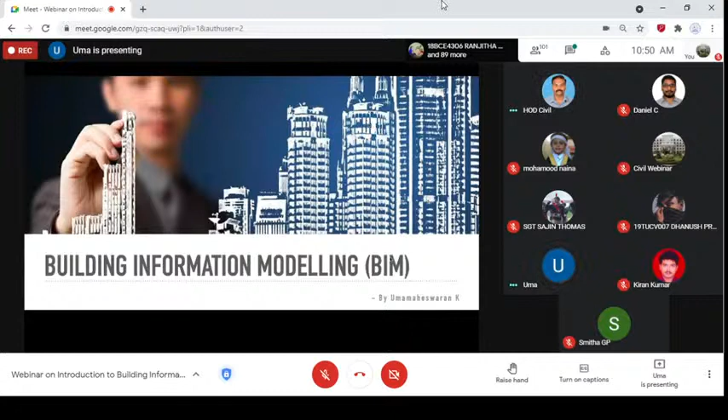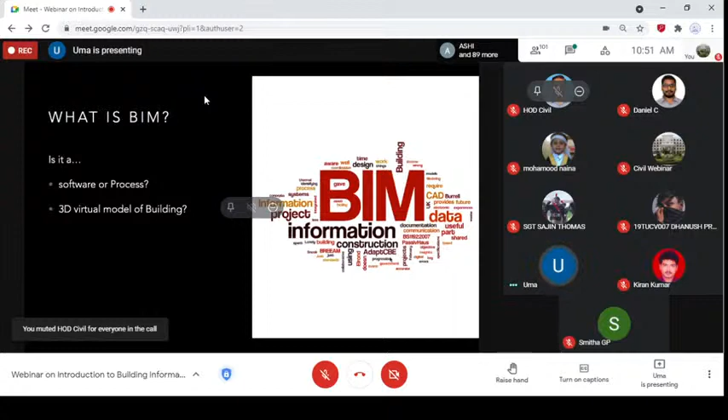So what is BIM actually? Is it a software or a process? Is it a 3D virtual model of a building? Or is it a collection of all building data to help query it in a visual way? These are the things people assume when they hear the word BIM, right? It is actually everything and much more.

One of the main misconceptions is that people think BIM is a software, which it is not. BIM is not a software, it is a process, it is a concept. To put it simply, in very layman's terms, it is like having a single file for the whole construction project. All the work, all the data, everything is collectively put together and shared as a single file — that is the concept of BIM.

We'll go deep into that. Before continuing, I want to remind you that right now you're seeing the screen share of my laptop, but I have also shared an iCloud link with Sarangan, which I think he posted in the chat. You can also click that link to view the presentation in the browser while still hearing my voice through Google Meet. If you view it in the browser with that link, it will be of higher quality — it's just an option for you, you can check it out.

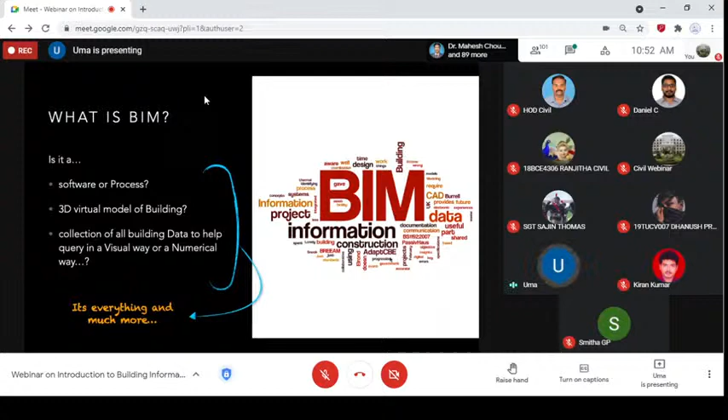Moving forward, so what is a BIM? It is actually a BIM model — nothing but a virtual equivalent of the actual building parts and pieces used in building. So when you model a building, you are completely constructing the actual construction in the virtual world, and that kind of detailing should be there in this virtual equivalent. That is the actual BIM model.

And when we say, many 3D models are just about length and breadth, right? But a BIM model should also have the characteristics.

So what do you mean by the physical-logical equivalent of the counterparts? It means that when I say this part is concrete and this part is steel, and when we stress or compress it, that actual property should be available even in the virtual model. So that kind of physical property should be implemented in the virtual model.

And the intelligent elements such as walls, columns, doors, stairs, all should be there, which will help us simulate the building even before construction starts. So that is the actual purpose of BIM, right?

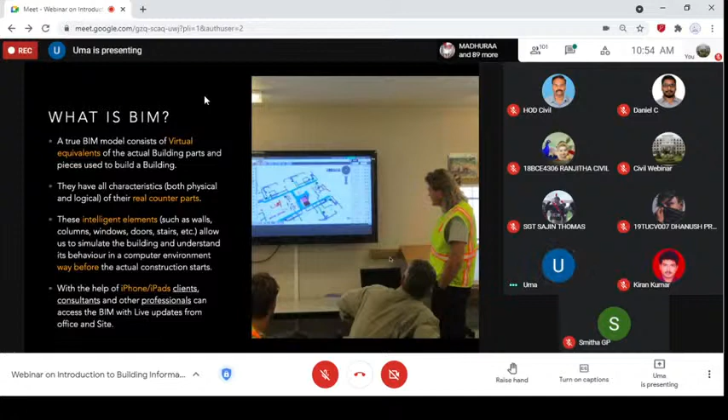And the last thing, an additional outcome, is that it helps collaboration. With the help of our iPhones and iPads, clients, consultants, professionals, all stakeholders involved in a project can collaborate on a single platform. Not like what we are doing right now, handling separate files — everyone handles that single file.

So what is our industry doing so far? Before the introduction of BIM, we had our computers, our models, and software. Everything seemed good and well, right? But what is actually happening, I'll tell you.

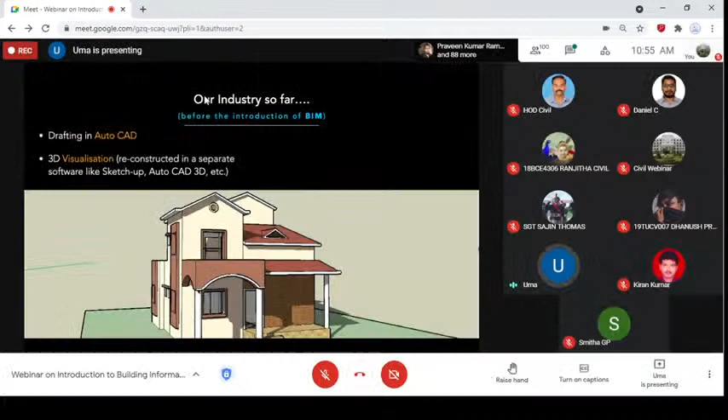So we do our drafting in AutoCAD — that's a separate thing. And if we want to visualize in 3D, we use software like SketchUp, AutoCAD 3D. But the important thing is they are reconstructing the same thing separately from scratch in that new software. That's something funny happening. They have the drawing in AutoCAD as a separate file, then reconstruct the same thing in SketchUp from scratch just to show it in 3D. That's what's happening right now.

And the same goes for analysis software — there are so many, like Staad Pro, ANSYS, and others. But again, the same thing applies: if you want to create and analyze that model in Staad Pro, you have to construct that model inside that software from scratch.

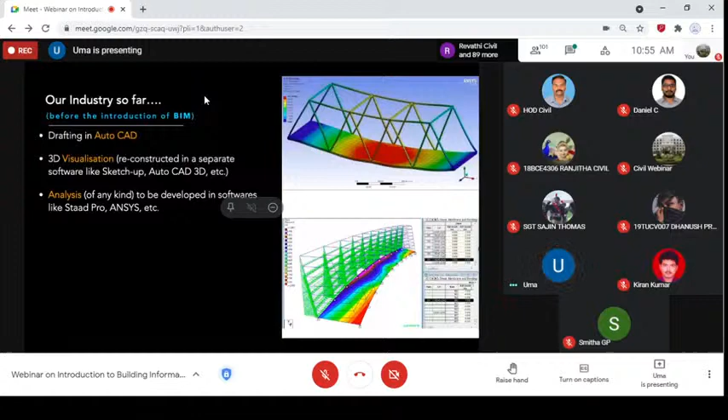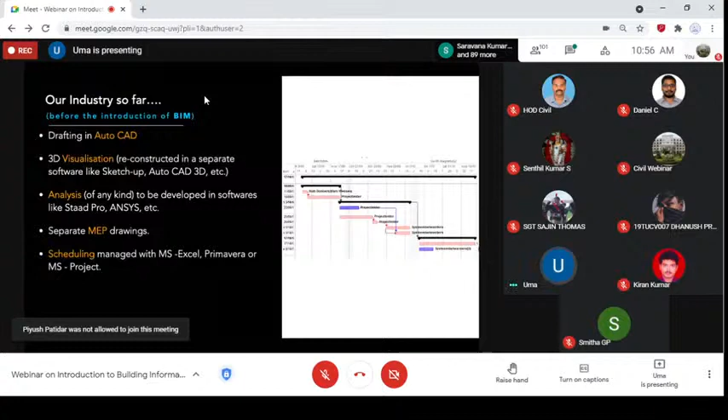And finally, everything has a separate documentation process — manual paperwork still happening. Because of this, the outcome is poor collaboration between all departments and stakeholders. This is what's happening in our industry so far, and we can confidently say this has been the case for almost 10 to 20 years — it's still happening in most projects today.

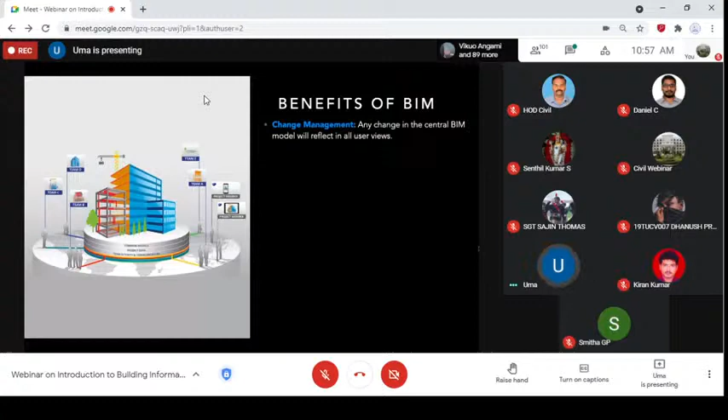So what we are trying to do with BIM is essentially the opposite of the previous slide. If I change anything in the center, whatever you change in that single BIM model will reflect in all views, for all stakeholders. I'll just let you read these benefits since they're self-explanatory — it's just the opposite of the previous slide. I'll give you a few seconds to go through them.

Hello sir, excuse me sir. Sir, can you please make it full screen so we can see it clearly? Yeah, it is in full screen mode. Sir, again, my laptop is in full screen only. This is the maximum — I don't know, maybe something with Google Meet. Are you seeing any of my laptop elements other than the slide? No, sir, no. Then that means it is in full screen. Okay sir.

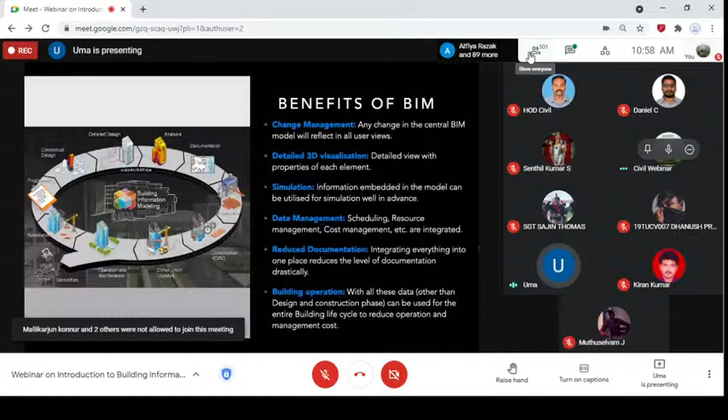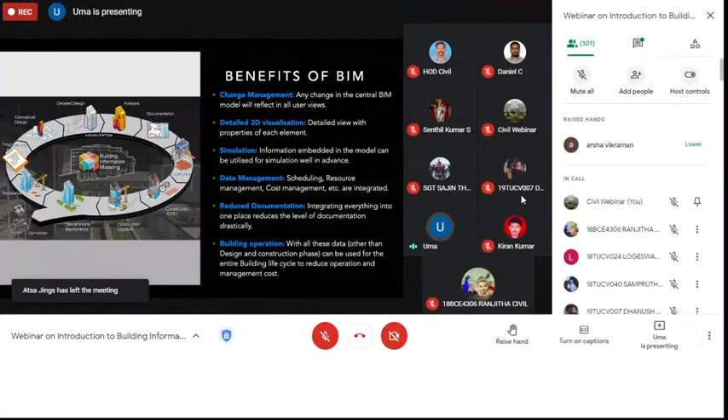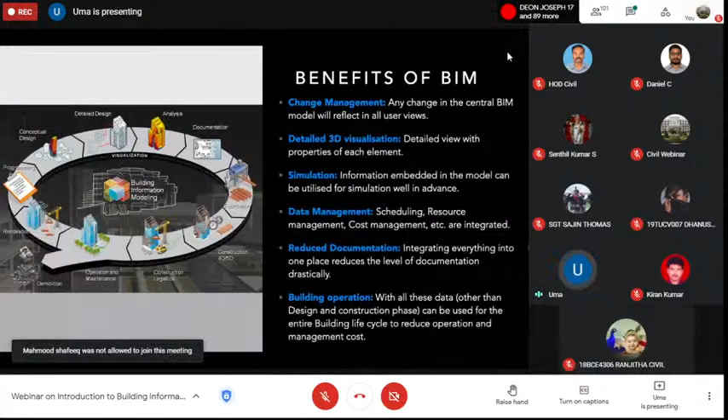So essentially, we are trying to collect the data right from the starting planning and designing stage — all the data, resources, and calculations put into a single file, and have it for the whole building cycle. When I say whole building cycle, it's not just the start and end of construction — it's the life cycle of the whole building: working, operation, maintenance, till the destruction. As you can see, the whole cycle goes till demolition. All that data, from start till demolition, is present in a single file, which we call the BIM model of that specific structure. That is the whole idea.

Okay, shall we move to the next one? Okay, I am going.

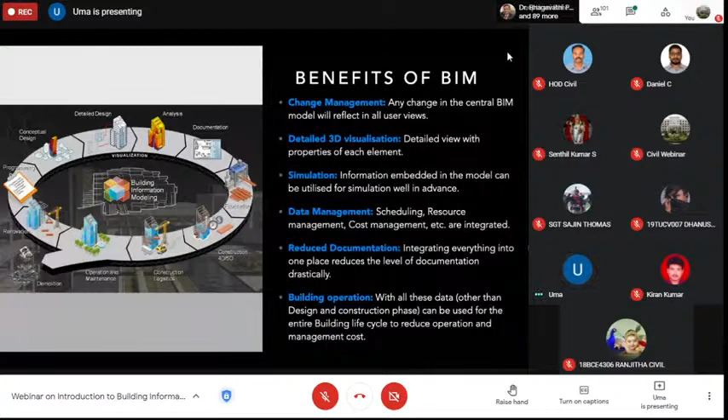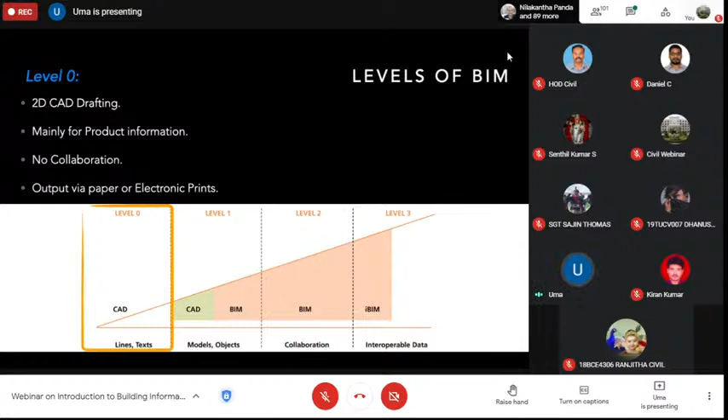So I have essentially told you everything about that - you will just quickly give it a read. This is level 0. The last point is the worst part: whatever they do in the computer, they take it out as a print. So it is in paper and electronic prints, and everything was manual. That is level 0.

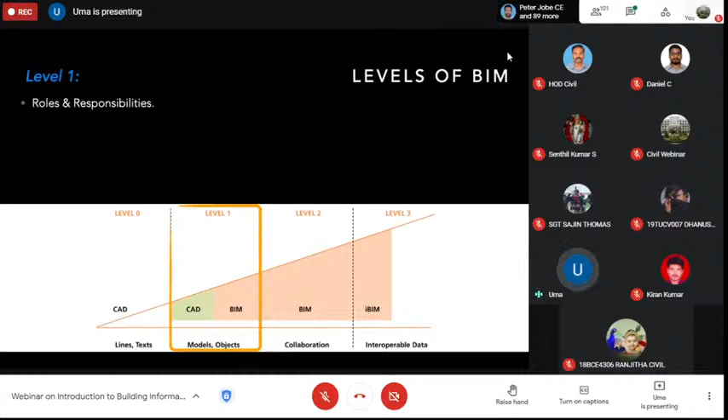Now comes level 1. We can for sure say that even the low level or basic construction sites are following level 1 up to some level - I can say they are starting. Everyone is having mobile phones and computers, so that is how it is happening, they are using systems. Because of that there are some roles and responsibilities.

When I say roles and responsibilities in the digital world, I mean in the digital part of construction, people are having roles and responsibilities. And naming convention is nothing but how to name a file. So architect people will have naming conventions, and designer people, scheduling people - all the departments will have a naming convention for the revisions and everything. That is called naming convention.

Common data environment means nothing but having all the files in a common area where all other members can access it. Put it simply, it is nothing but Google Drive - like Google Drive or Dropbox. But generally people won't use that because of security reasons, so they have their own servers where they put all the files into that common data environment, so that it is accessible by all the other members.

Most important thing is the file is up to date even for the other member. For example, if I have a file in my local system and I do an update, I have to send that file as an email - even we are doing that even now. But if it is in a common data environment, if I make a change to that file, when the other person opens it, it is immediately visible to him. So that is the great advantage of common data environment.

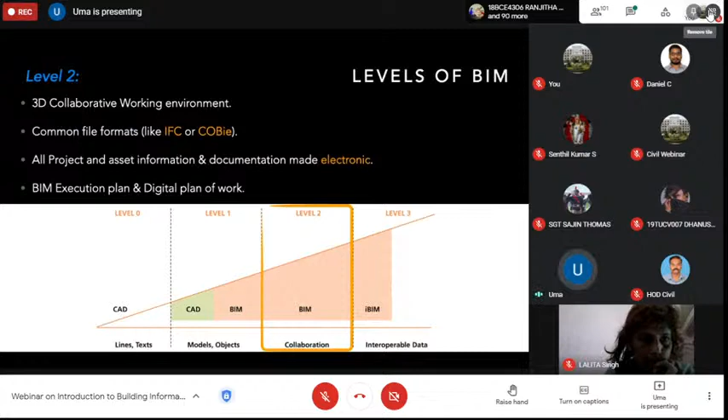Another thing, the second point, is common file formats. Even before the project starts, the stakeholders, most importantly the clients, should have guidelines saying this kind of file should be followed with this format. Let me give you an example.

There are many drafting softwares, one of the most famous is AutoCAD. For 3D modeling, if we go to one person, he might use any software of his wish, like SketchUp or AutoCAD 3D. That should not be the case. The client or stakeholders, when signing the project itself, should predefine that if you're going to give this kind of file, it should be under this format, meaning the person creating that 3D model should follow only that file format or software.

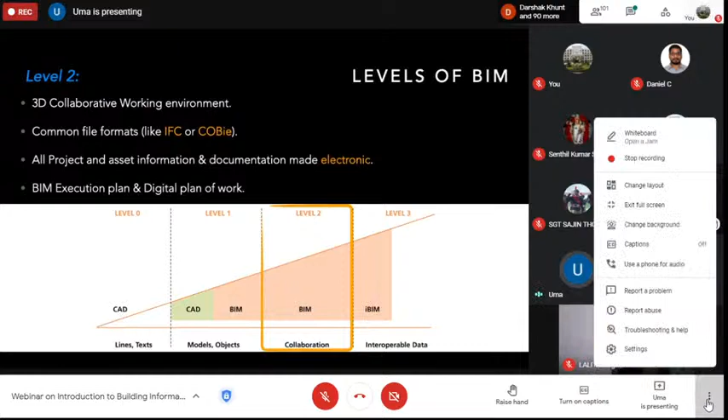Why is that important? Because there are so many stakeholders, hundreds and thousands of people sitting in different areas and departments, with separate systems. When this is defined in the starting stage itself, sharing of files means when the other person gives you his file, you'll know it will open in your system. That's the advantage of having a common file predefined at the start. That should happen, which is not happening currently.

You might not see this as a big point today because we ourselves are using common files - we assume the other person will have AutoCAD, we assume they'll have SketchUp, we assume they'll have MS Project. But we shouldn't assume, we should have a defined format. So that's the second one.

All project and asset information and documents are made electronic - in other words, no paperwork. And there's a BIM execution plan and digital plan of work, meaning there should be a separate BIM department in the company to take care of all this work. There should be a BIM strategy head who defines the steps we're going to take. There should be a separate department predefined in the company itself, not just for that special project, but a department in the company itself.

This level 2 is something people are struggling to achieve worldwide, not just in India. I'm not saying it's not happening in India - it is happening, but only in a few companies like L&T, which we can count on one hand. It's happening in India on a very small scale, but it is happening. We're equal to the whole world.

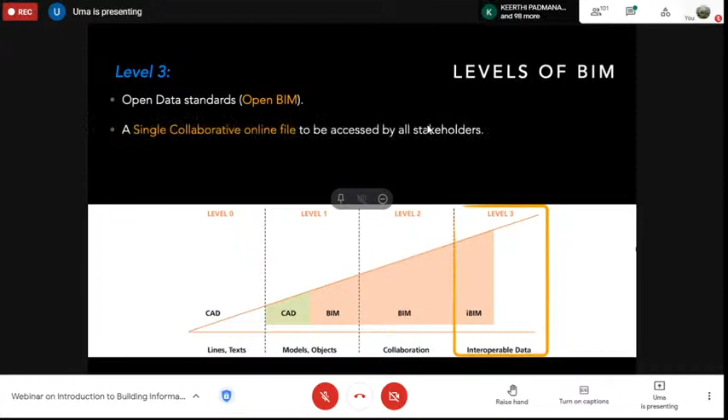Now comes our future, or our vision - level 3, which is nothing but open data standards. All file formats shouldn't be restricted to access only through specific software. A file shouldn't say it can be opened only through this software. It should be open source.

What can I tell for an open source file? Yeah, we can say PDF. So PDF is an open source file. You can open that PDF in any reader or document reader, because it's an open source file format. But that's not the case with our Revit files or other BIM 360 or mostly other AutoCAD files. If you want to open a Revit file, that can be opened only using Revit software.

That shouldn't be the case in the future. That is what we meant by saying open standards.

Second point, which I have repeated many times, is to have a single collaborative file online, which can be accessed by all the stakeholders. Third point is nothing but the first point, resolve and eliminate issues such as copyright and liability. Hope this makes sense, from level 0 to level 3.

So in short, whatever we discussed, it is here. I'll give you a few seconds to go through it.

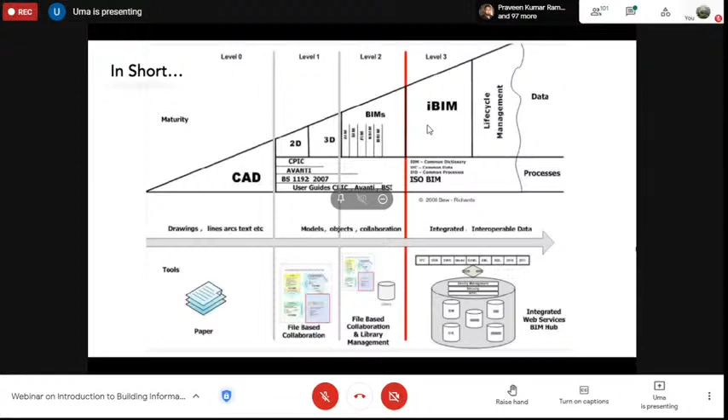Now we look at the different stages of it. Few people might be familiar about this, but still, it's good to see it in a different angle.

First thing is a 3D thing. Obviously, if you are a civil engineer, you will know what a 3D drawing is. It is the typical 3D visualization of the structure. It contains the properties, information and elements with its properties. That is most important, so it is not just the length and breadth, as I told you. It contains the property of that material that you are defining inside that model, from glass or concrete, steel, whatever.

What is the importance of having that property? It helps to simulate. There are many wind testings, right? Wind testings or what to say...

Just a minute, guys.

Okay, yeah, sorry, coming back. So it helps for simulation, that is the importance of having properties. Like as I told you, the ANSYS software or the STAAD.Pro software uses these properties.

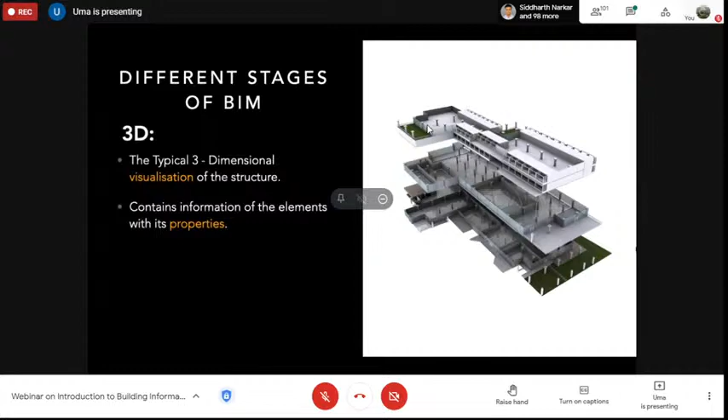Only a few people are following it, but I'm happy that few are following - they are directly starting their projects in Revit itself. When I say Revit, it is nothing but a 3D model with properties. So in Revit with properties, they are modeling it out, and from that, if the site people are asking for drawings, you have to extract the drawing from that Revit model. So that is what I mean by 2D should be extracted from the 3D model. It should not be the other way around - you should not start designing in the 2D thing.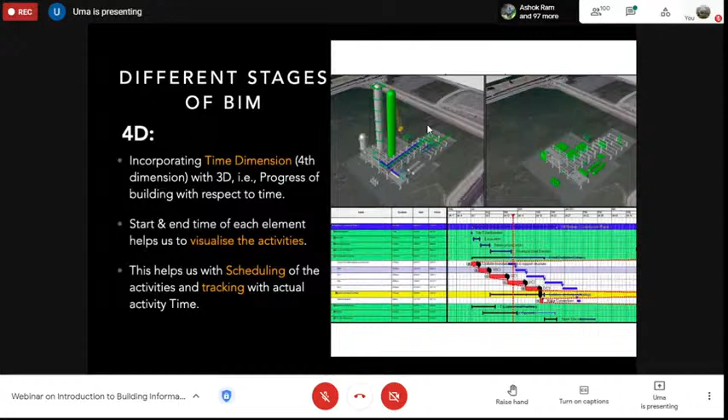Okay, going to the next one. So what is 5D? We already have 4D, and if we include the cost element to that 4D, it becomes 5D.

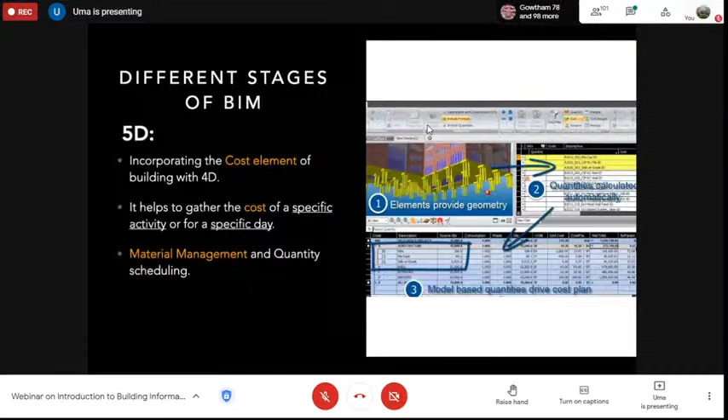And with this, we can have material management and quantity scheduling, bill of quantities. If you work in a site, you know how big a deal bill of quantities is, because it's a tedious process to calculate each and every quantity with its cost accurately. So if you are integrating all the elements correctly inside this BIM model, and if it becomes 5D, this bill of quantity will be retrieved automatically with just a single click of a button, which is huge.

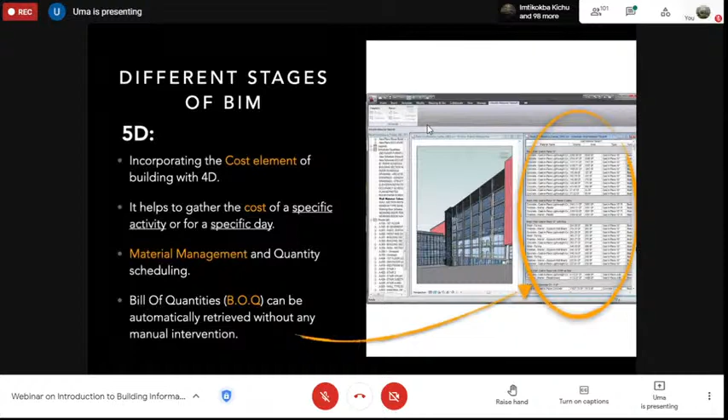Okay, going to the next one. Level of detail. A few people might be confused, previously we saw levels of BIM, but that is different, and level of detail is different. The level of BIM is nothing but how much we have started using, or what is the implementation of BIM in the world. So that is the level of BIM.

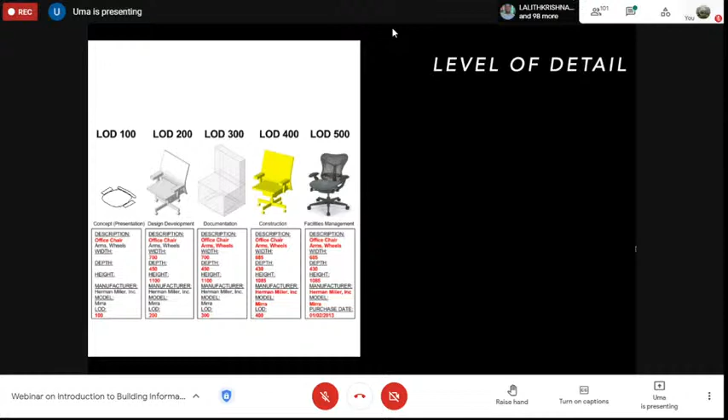Level of detail is nothing but the BIM model that you are creating - what is the level of incorporation of the detailings inside the BIM model. So that is the level of detail. I've shown an example using a chair, but the main idea is you are going to model a structure, a very big building. Keep that analogy in mind.

So yeah, this is actually self-explanatory, so I'll just allow you to go through it. It's much better if you read it out rather than me explaining. So LOD - one thing will be very clear, as the number increases, the detailing increases. So yeah, this is LOD 100.

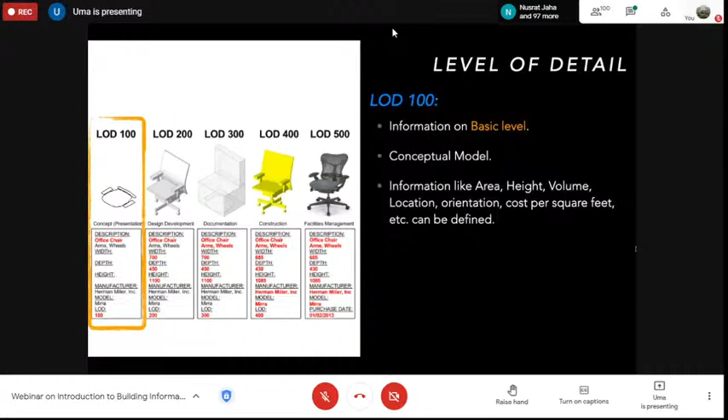Go into the next one. This is level 200.

So this is what I say - why do we have so much levels? Why can't the whole world follow one level of detail? It is similar to having our reconnaissance survey or preliminary survey, and then later on having a detailed survey. So to start the work, people will have at least a level 100 or level 200 and give that file to the next department, so it gives a brief idea about the structure and the project, so that the next person can start his work. So that is the use of having LOD, and also it's much faster.

At that stage, it is enough, so it is faster. A few sites are following level 300, and when I say following, it means it's the final level itself. A few sites are following this level 300, they don't model more than this level 300. By the way, it's the basic thing for a finished model - at least it should be level 300 to say that it's a good BIM model. So this level 300 gives you the analysis.

Just a minute, guys.

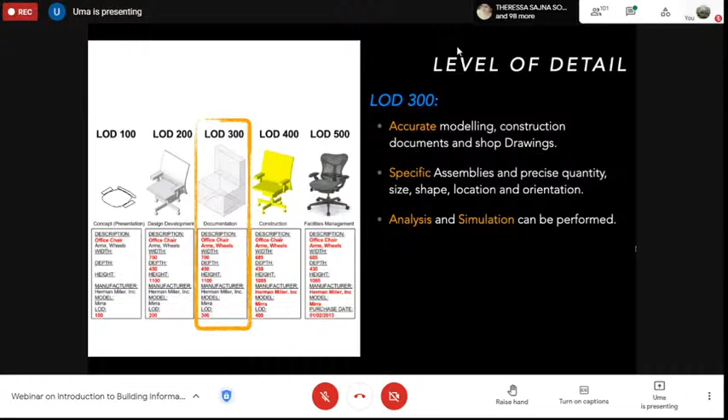So there's something called LOD 350. Why I have included this is our metro projects all over India, and specifically our Chennai metro, are actually following this level LOD 350. By the way, metros are one of the first projects - I'm not saying it is the first project, I'm saying it is one of the bunch of first projects to incorporate BIM. So when they incorporated BIM, they were using this LOD, which is nothing but in between 300 and 400.

Okay, so this is LOD 400. This helps for fabrication mainly - you have a file, you're going to give it to a vendor for fabrication. This LOD 400 will have enough information for the fabricator to exactly shape, cut, and create. So that's the whole idea.

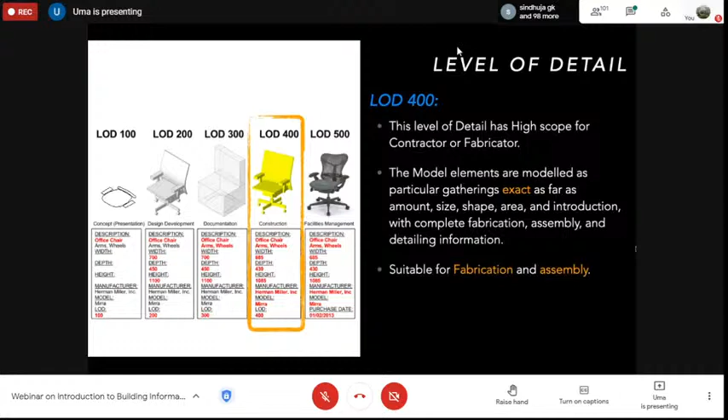So this is the ultimate level of precision of BIM model you can have. This final level of development or as-built condition means the actual built structure, millimeter to millimeter, has all the details inside the virtual model itself, right from the starting.

Let me give you an example of walls. The Revit model doesn't just contain the wall width and thickness, you also have how much steel, concrete, everything is there, and levels up to the paint level - the plastering, the punning, and the paint level. Even that paint will be defined in that model, with its thickness and all those details.

This is the ultimate level, which is very rare, but yes, people are doing it. If this has been done, it can be used for the lifetime of the building, which helps for maintenance and operations of the facilities after construction is over. Say you finish construction in 2 years, but that building will go for more than 50 or 100 years - that file will be used for that lifetime of the building for maintenance and operations by those people.

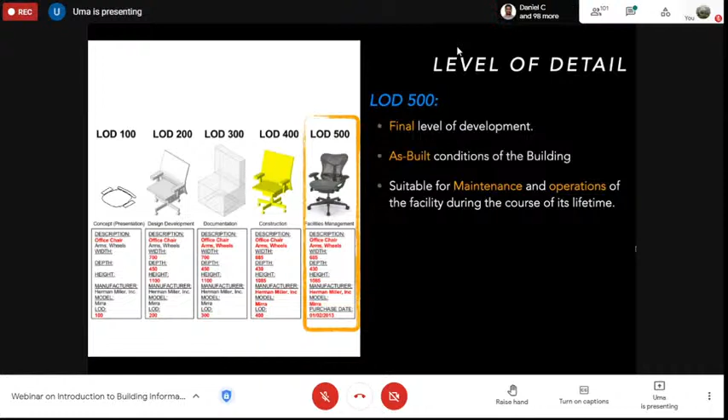So what are the softwares used for BIM? I'm just listing a few, it's not restricted to this - the ones I'm listing down are just the famous ones people are using worldwide. So a few involved in BIM creation right now are Autodesk Revit, which is the main one, MSP and Primavera for scheduling.

Navisworks is for clash detection and coordination management of different departments. We have the structural model, we have our MEP model - those are different files. Then we have fire safety models, then piping and everything. All the different files are combined and checked inside Navisworks - that is called coordination, so Navisworks helps with coordination.

BIM 360 for the site people. This software essentially collaborates all the different softwares together, to put it simply. It is used on site both by the site people and the office people. These are just a few items, there are many, by the way.

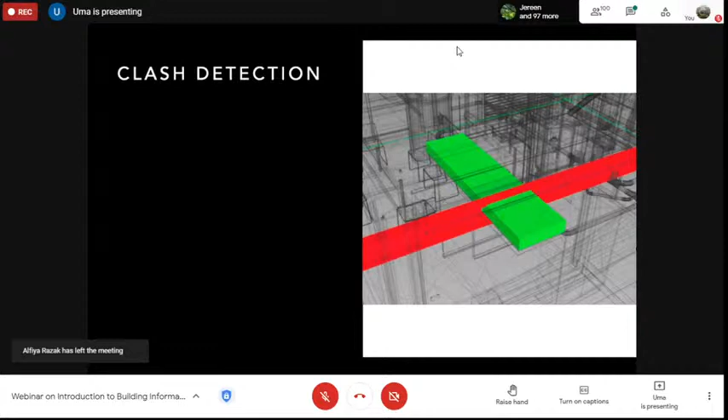Navisworks is essentially used for clash detection by the BIM coordinator, who will be predominantly using this software. So what is actually clash? Clash occurs when elements of different models occupy the same space. The structural model is different, MEP - mechanical, electrical model is different, plumbing model is different, fire hydrant models are different systems designed by different people. So that's why it's called different models. If you put them together and check for clash detections, if it occupies the same space, there is a clash.

How was it done in older times? The older process involved overlaying the drawings to see if there were any conflicts - when I say drawings, it's nothing but 2D drawings. They overlay on top of each other and check manually. But with BIM, the software does it automatically for you.

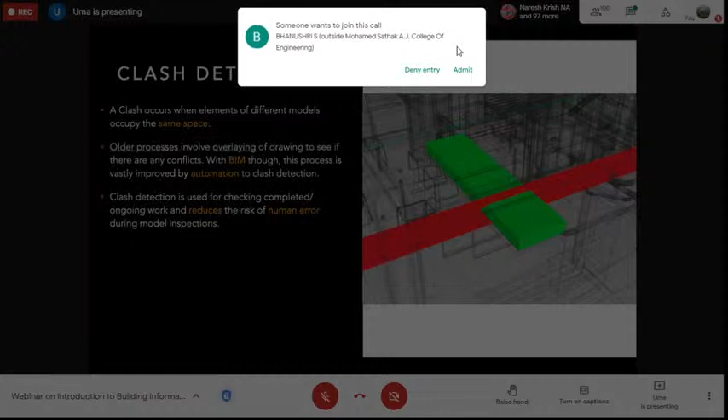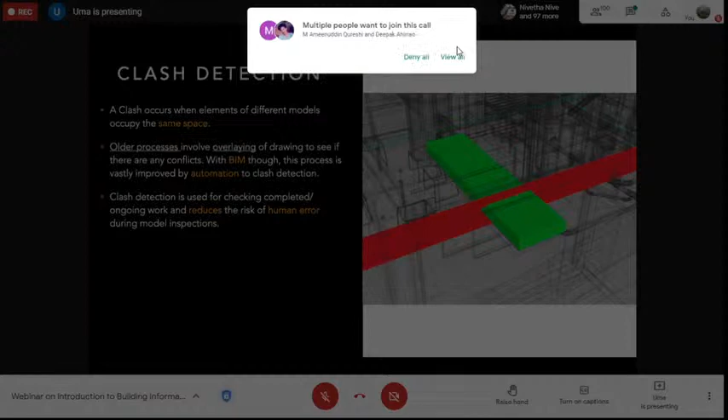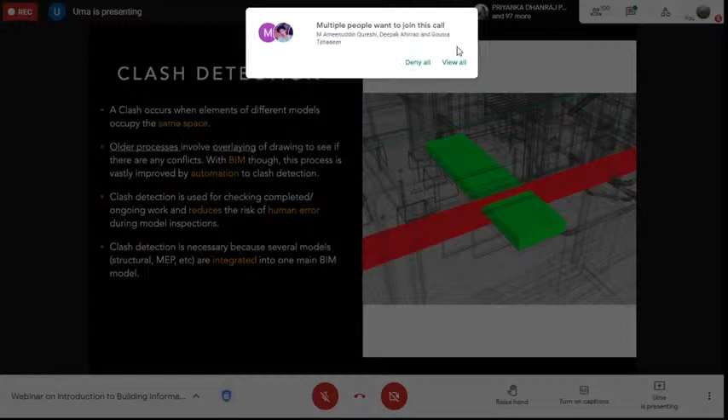Why do we need to do this clash detection? It is used for checking completed or ongoing work, and it reduces human error during model inspections. If you have different model papers on top of each other to check, it's highly likely you might miss a clash yourself because it's human error. Again, several models are integrated into one main BIM model.

It helps to avoid mistakes which normally would have been discovered on site. If a clash is detected at site level, think of the implications - we have to redo the work, or sometimes even redesign, because there's a clash detected only in the site during construction, which is very bad. So this helps to avoid those things.

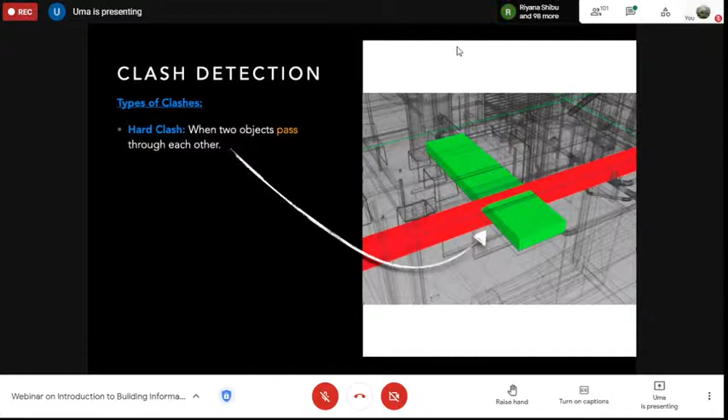There are three types of clashes. One is the hard clash - when two actual physical objects clash, meaning they pass through each other in the model. That's called a hard clash.

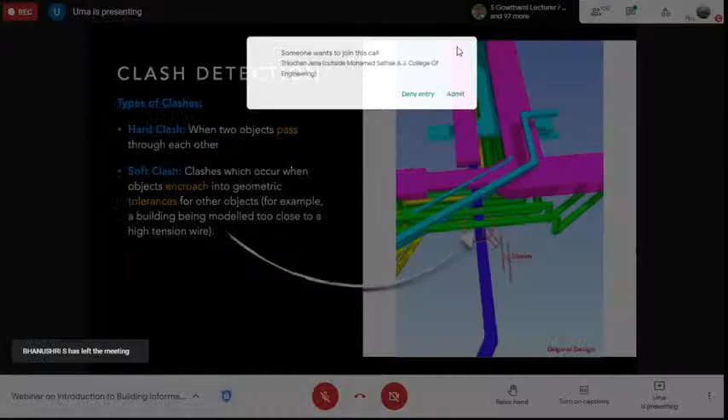Soft clash - two different elements are not actually touching each other in the model, but they are coming very close to each other such that they are interfering with the tolerance level of the other object. For example, a building modeled very near a high tension wire is wrong - that's a soft clash. You check how far the high tension wire is away from other structures.

The next kind of clash is the workflow clash, which is nothing but 4D - scheduling and checking. When different aspects of work are supposed to be sequential but are scheduled to occur together or in reverse, that's having a check on the time, schedule, or parallel works. That is called a workflow clash.

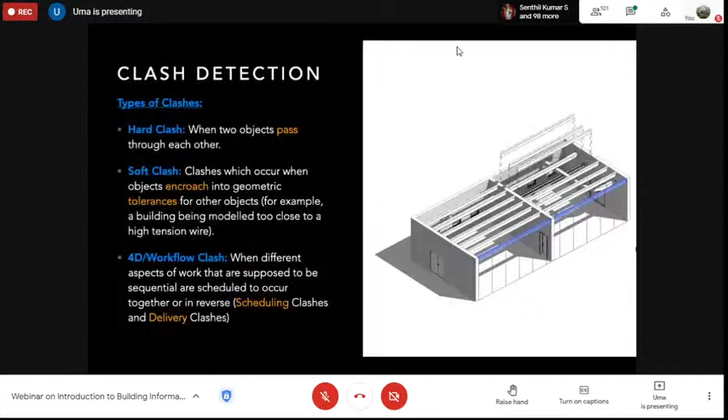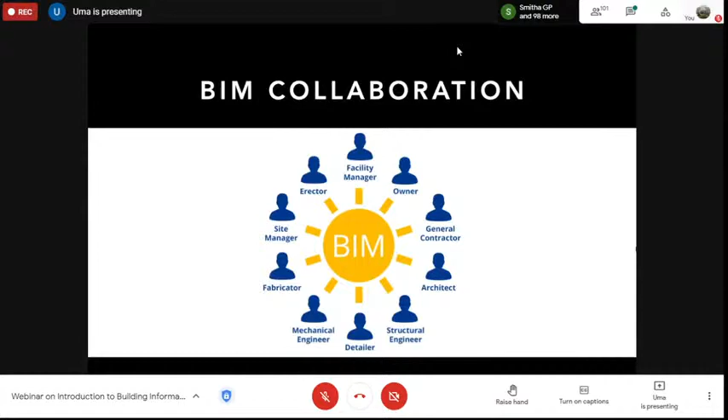This keeps repeating, but I've stated a few facts in these slides, so I'll just ask you to quickly give it a read rather than repeating it again.

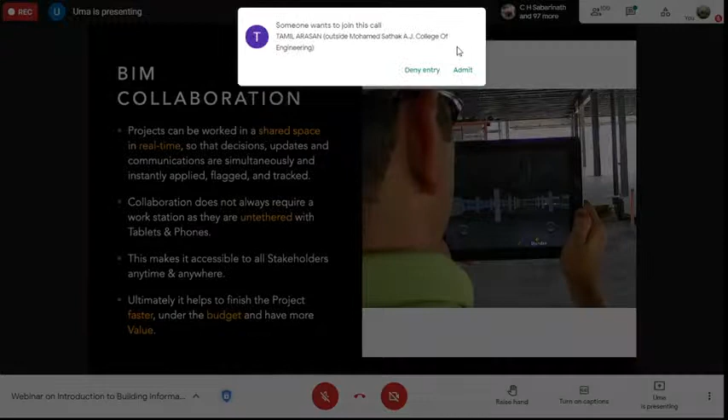Okay, moving on to the next one.

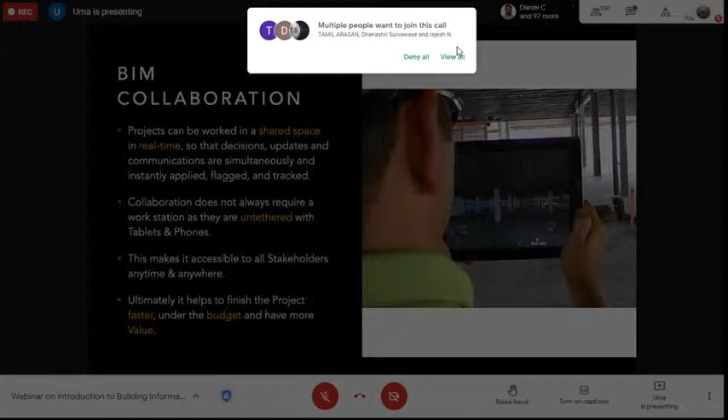Many people totally forget about this factor - there's an important concept called safety on site. They say safety and quality; I won't talk about quality in BIM today, just safety. Until the previous slide I was talking about designing, planning, coordination - those are okay. But for safety too, you can create a separate safety BIM model which can be used by safety engineers and officers for checking.

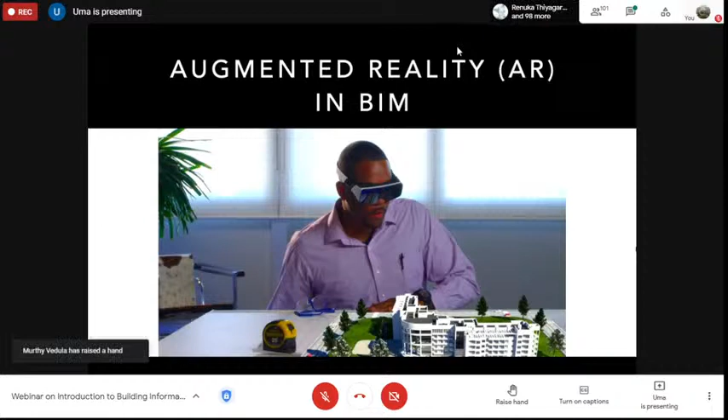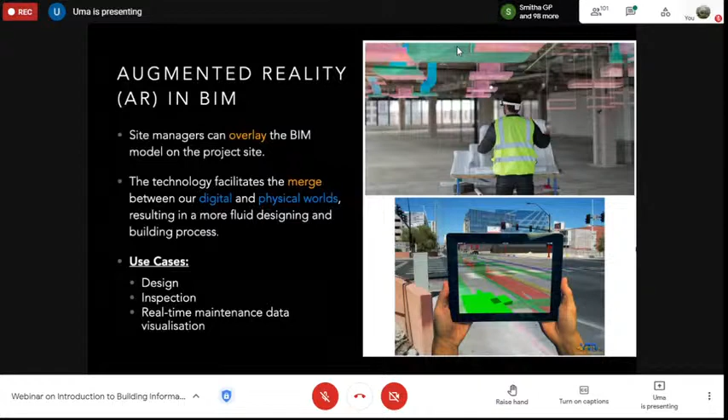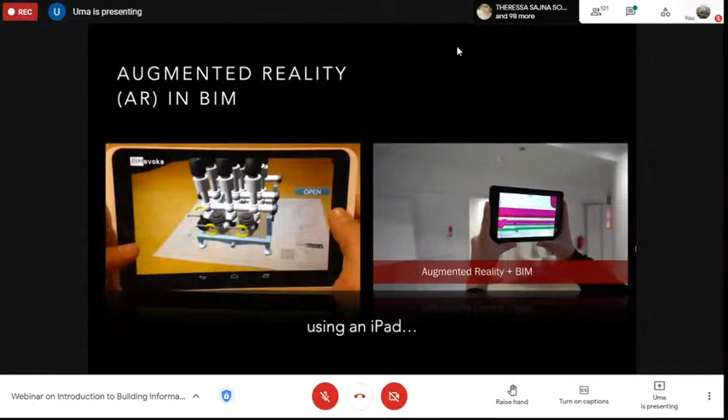So this is an example using an iPad. Same thing, if you look at the right one, that guy is using the iPad to check it. That lady is actually using that BIM model to check how that pipe is being laid in the building. Using that BIM model only, she is able to view in real time, as though she can see the actual contents of the actual file. Okay, that is AR, but using an iPad.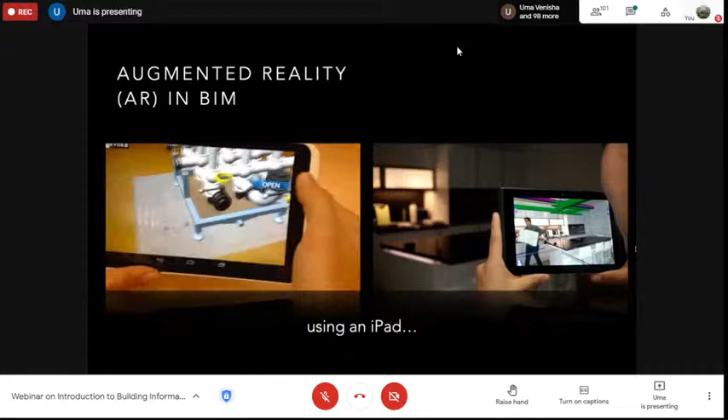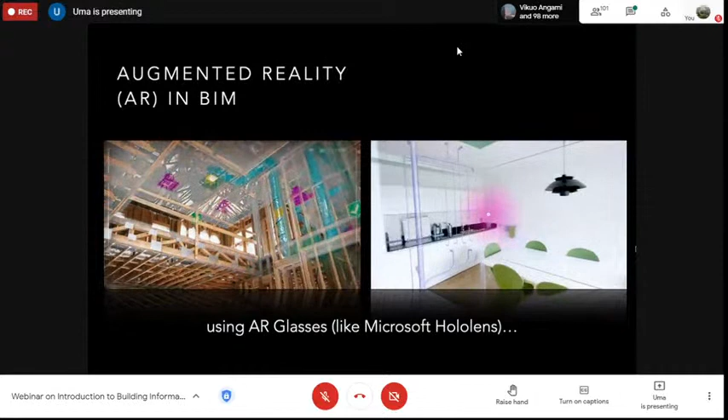So the next one is actually AR using a glass, like Microsoft HoloLens. You can look at the left guy - same thing, he's looking at the same, different. The important thing is he's looking at it before construction - the actual thing is it is under construction. He's just checking and verifying whether those things are correct according to the file. Okay, it's such a big deal.

Think of it - you are not having any paper, or even if it is a digital file, you usually used to have that model on the phone and then check. But here it is essentially overlaying on top of the actual structure itself, and you can check it there and then. It's such a big deal. I mean obviously, everyone is going to use it in a few more years.

So what is the one thing that we are lagging today? Why is it not used by everyone? Simple - cost. Only because of the cost. People are like capable of designing BIM models.

People already have software to design BIM models, and all the other essential parts for this AR structure. The only missing thing is the display device. Even for some companies, iPads are a big deal—they can't afford 70,000 or even 1 lakh iPads. So the iPad is just a starting stage for AR. Think of HoloLens—I don't know today's price, but it was like 2 or 3 lakhs for one piece of that glass. Our vision is to have everyone on site wear these glasses, but cost is the problem.

So that brings us to the conclusion. I hope I was in time. So what is the conclusion? BIM requires more time in the initial stages, but it drastically reduces time in the further process.

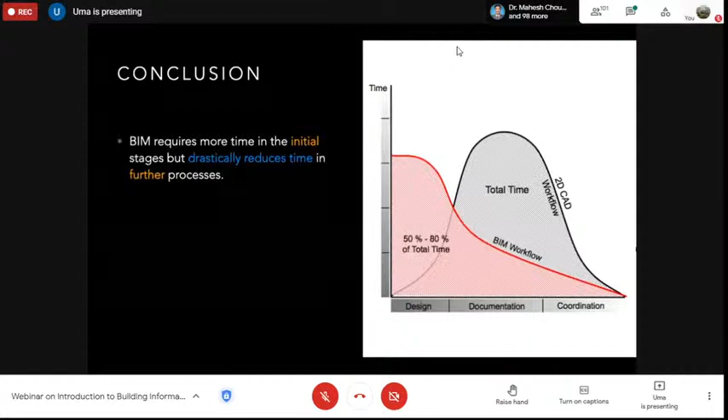As the graph shows on the right side, the conventional flow's time requirement is shown in gray. Initially it doesn't require much labor or man hours, but in the documentation or middle stage of construction, it requires a huge amount of man hours, and again reduces at the end. But in BIM, it's slightly different. Most of the labor-intensive modeling work is done in the initial stage itself, taking a lot of time and cost. But since everything happens in the initial stage, it helps reduce time in the future for all stakeholders. That's the key difference about BIM.

Another important thing is it helps create a virtual copy of the whole construction process—right from the designing and planning stage, not just pre-construction. People think about design initially, but even during construction, we keep updating the BIM model: this is the planned scope, this is the planned date, this is the actual scope, this is the actual date it was completed, and these are the issues and problems encountered. Everything regarding that activity and structure is updated in the BIM model, which is a big advantage—within a single file, you get a very comprehensive summary of whatever you want to see.

It also helps in maintenance and operation during the building life cycle. After the building is constructed and is running and operating, this BIM file helps with maintenance and operations. So that is the whole gist of our BIM concept in civil engineering.

I hope this was helpful to you, and that it somehow incorporated some interest in BIM. If that happened, I'm truly happy, and that's something I wanted to reflect through this session. Thank you everyone, it was a pleasure giving this presentation, and I sincerely hope it was helpful. Thank you, and thank you to the management of the college and all the staff for giving me this opportunity.

That's a good question. I didn't want to say this, but you start with Revit. People assume that if you know Revit, you know BIM modeling, which is not true. But still, you start with the Revit software, try to learn how modeling is done inside Revit, and learn that completely.

Then you can go ahead with other software like Navisworks. I'm talking only about Autodesk software because it's the predominant software used in the industry, so that's why I'm giving you softwares from Autodesk. There are many softwares, but you start with Revit, then go to Navisworks, then the subsequent thing - there's something called BIM 360, which is the final step. BIM 360 is nothing but collaborating all the other softwares. You start with Revit, and if you're totally fresh and new, start with Revit right now. That's what I'm advising.

There's one more question from Mr. Satish - he's asking if you're using BIM software, does the project cost increase or not, and if it increases, what are the steps to reduce the budget? So what you're asking is because you're using this software, your cost is increasing, right? How to handle that - it essentially comes back to the same example I gave before.

If you're going to implement BIM, there are going to be costs incorporated - the software cost, the system cost, the cost of the person designing the BIM model. That's one level. What you have to think of is whether your project cost justifies using that much BIM into your project.

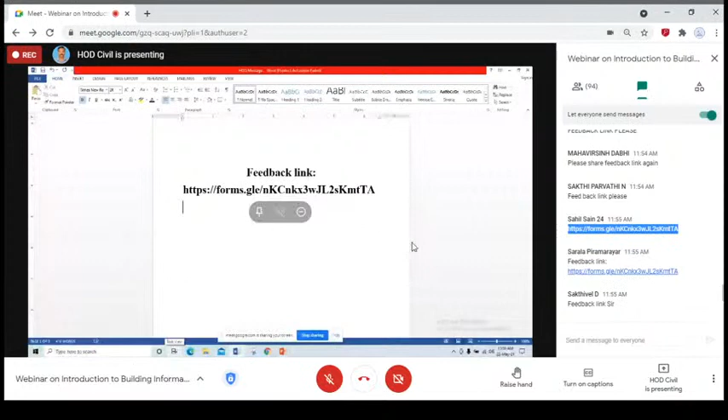One important thing people are forgetting is IS codes. There is no IS code till now for BIM, which is actually shameful. I am not criticizing just India - all over the world, there is only one country right now which has national standards for BIM, which is the UK. UK is the only country having BIM standards determined by the government. We have IS standards, similarly they have their own standards, but that is the only country today having something similar to IS standards. Our government should take a big step and bring those standards. Actually, the funny part is the UK government released their thing, and with the help of the UK guidelines for BIM, ISO is preparing the BIM standards. Right now there are 7 modules of the ISO international standards for BIM.

There are 7 modules, out of which 2 to 3 are out right now. Okay, so what usually happens is, any country, not just India, would take that ISO as a reference and modify it for their own country. That is what usually happens. So that should happen at a faster pace.

So one important thing in my view is government. Government should implement this as soon as possible, so that people know, okay, this is the standard, this should be followed like this. How many people will be there to spread this message? They can't. How many people are in today's webinar? This many people are there.

So this many people got this information, but what about the rest of the people? The spreading will happen fast only if the government takes an initiative. So when the basic standards are set by the government, this implementation, not just in India, the whole world will be very, very fast.

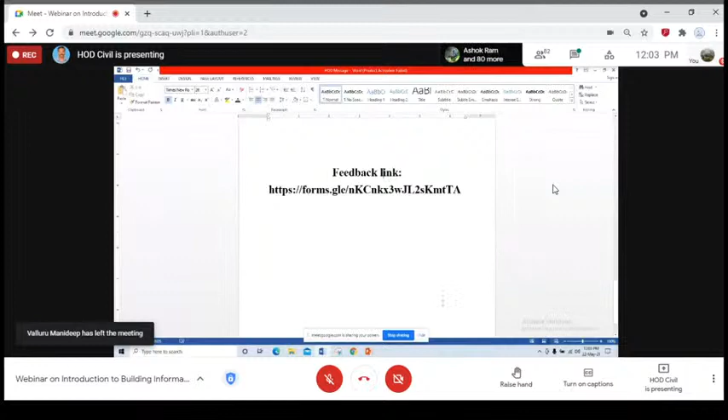They will be at least aware, okay, this is an option, this is how it should be there. They will try to implement it. That is what is called pushing, that is called implementing. So I actually take this opportunity to request institutions like you to push BIM for the future. Okay, thank you.